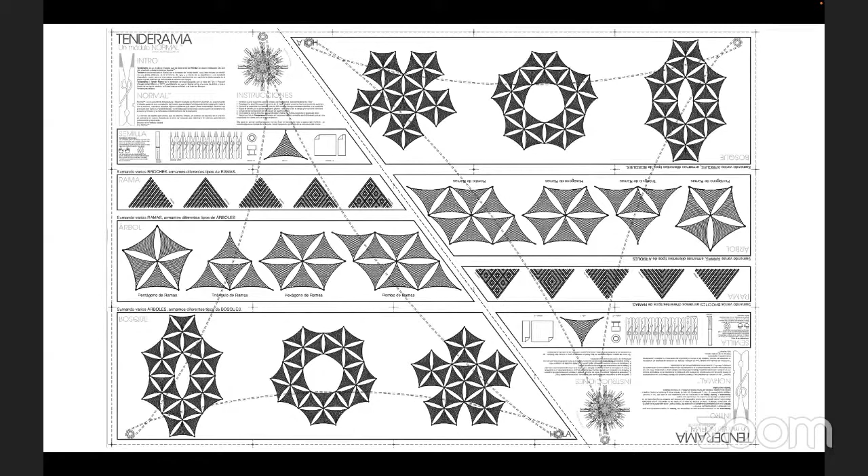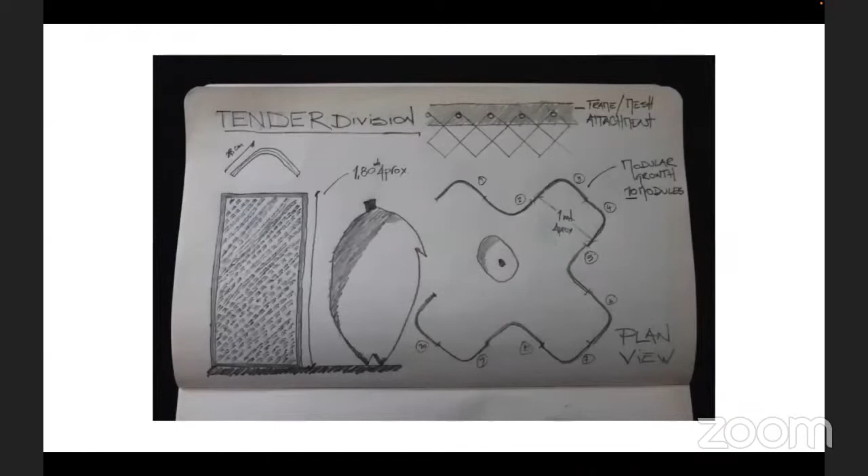So, Zoom, share screen, and I have to share. It's not Keynote, desktop, that one. Desktop 2? Desktop 2, yes. Share. And the other thing I have to exit is... I'm trying to get back to here. I don't know where the mouse is. Just try to hit play and see if it'll do it. Yeah, but I don't find the mouse. Oh, I got it. I don't know. Oh shit, wait, so the mouse, there it is. It's coming back. Here, play. Boom, got it. Okay, perfect.

Okay, we're going to get started. First, thanks to everybody for coming, and I'm going to have the really boring part, which is to do the introduction. We were joking outside with Rocky about stories when Martín was here in 2008. Rocky started to tell a story to Mark. Martín was like, wait, I'm going to tell it in the talk. So I'm just going to give a very formal introduction. Probably odd that I'm giving an introduction. Claudio could certainly be the person to give the introduction. Mark, you could do it. But I'm just going to read this and then turn it over to Martín.

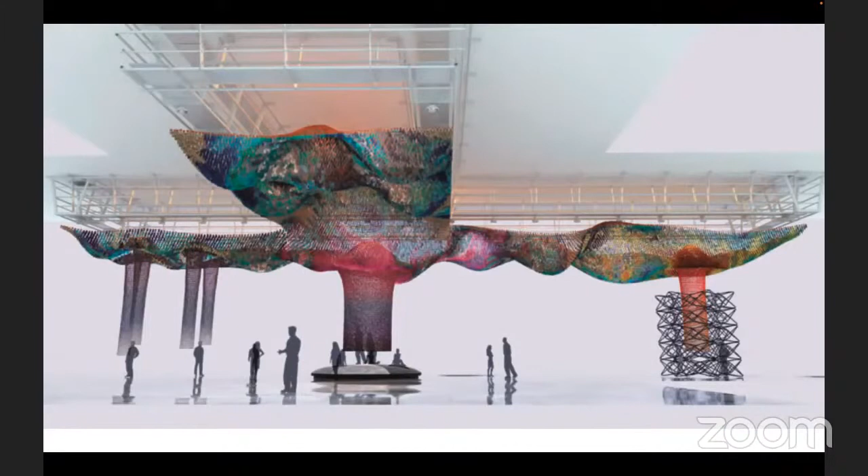So Martín Huberman is an architect and director of Estudio Normal in Buenos Aires, an architecture and research office where he develops experimental and speculative projects on the built environment. His works and projects have been exhibited in different cultural venues around the world. In 2011, he founded Mano Ambiente, the first nonprofit gallery in South America specialized in experimental architecture and design. The gallery has built and installed exhibitions from some of the most renowned offices of Ibero-America, and produced exhibitions with other institutions such as the Storefront for Art and Architecture in New York, Liga, Espacio de Arquitectura in Mexico City, and the Canadian Centre for Architecture. Since 2015, Martín has directed a preservation and development program for the archive of deceased architect Amancio Williams, experimenting with new forms of digitization and dissemination of this culturally important architectural archive. If any of you don't know who Amancio Williams was, you have to take a class with Claudio. Since 2018, Martín has curated exhibitions and research projects for different institutions and museums, such as the Canadian Centre for Architecture, where he is curator of the CCA c/o Buenos Aires program from 2020 through 2023. Here at ASU, Martín will begin to talk about his non-traditional career path, from his professional education to today. And with that, please help me welcome Martín.

Well, thank you all for being here. Should I have to speak to the microphone? Thank you, Phil, for making this happen, and thank you, Rocky, for lunch. I'm going to start by...

showing some of the earlier work that brought me here. This is a studio we were doing in Buenos Aires when Claudio Vekstein brought some ASU students to work in BA, and then afterward some Argentinian students would come to ASU to fulfill the work. I was the only one to come, and the program died after me. So that might be a good thing or a bad thing.

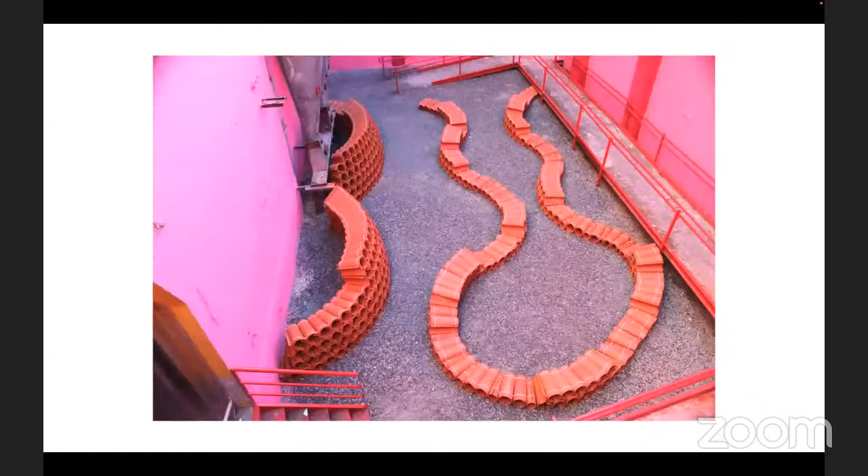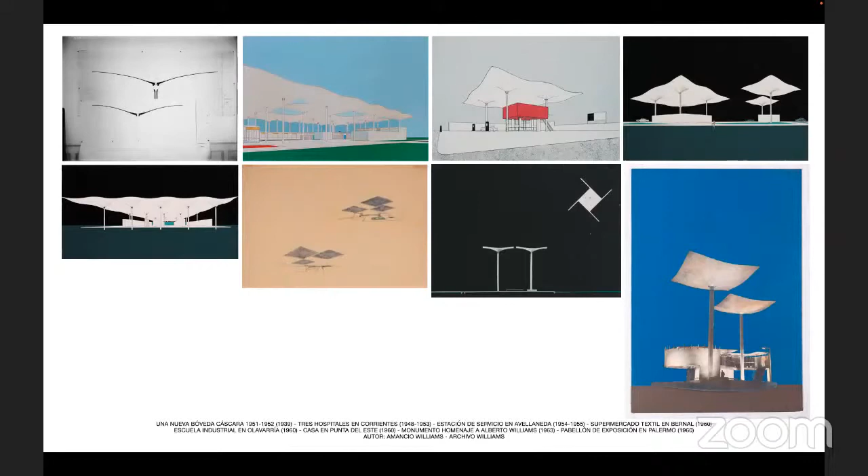The project we researched was the classroom of the future. There was a huge problem of classroom availability in the western US, where population growth of schools was surpassing their ability to build new classrooms, so they ended up adding trailers. We found those trailers were supposed to stay only a summer or a year, but they ended up staying for 15 years. So we developed a project based on research into how to create a classroom that would fit new ways of learning over 15 years.

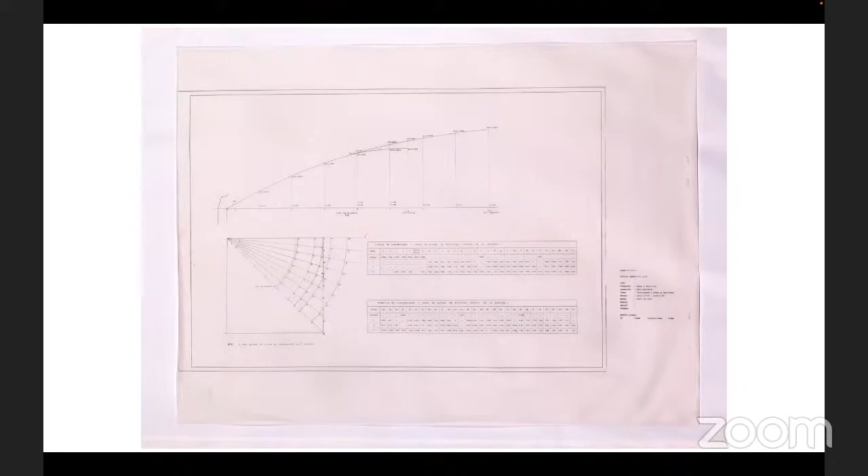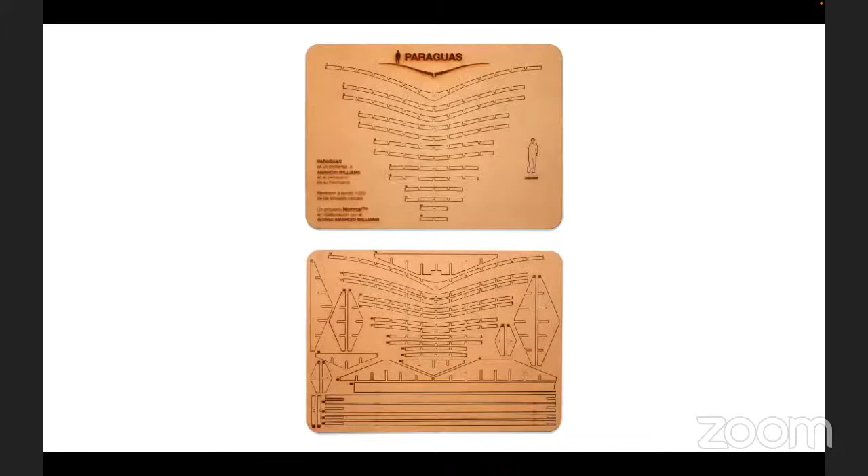We were hired by a London agency to work on large-scale pieces for a store opening in London. So very quickly, this is actually two years after leaving ASU, we were already traveling with our work. That was very, very fun.

Then we started working on new logics for how to create this language and how to take it not just into large-scale installations but smaller ones, allowing people to work their own micro installations. Through that, we made an object requested by a local museum to be sold in their store. For us, it was the entry gate to museums — in Buenos Aires, there are no exhibition spaces for architecture.

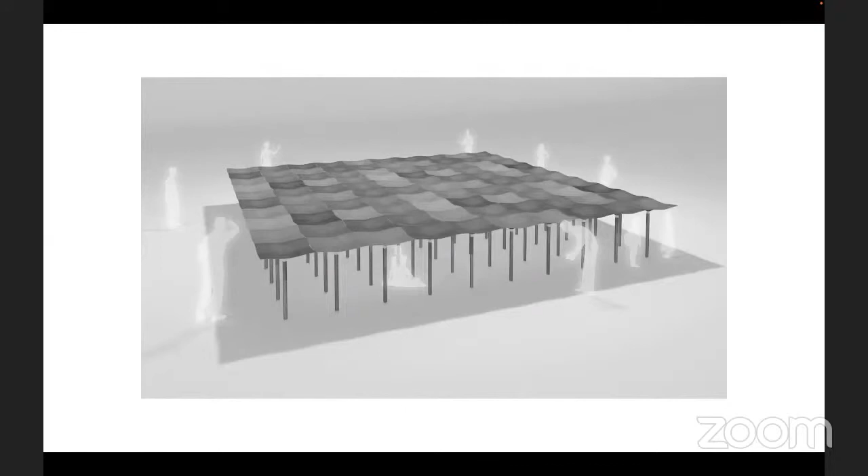This is in Paris, this is Madrid, and this is the office of Juan Herreros, Estudio Herreros, back in the day. We connected because he knew our work and asked if we could do something for his office.

This is when the system that up to that point was only a suspended system became a vertical system, like a wall. It allowed us to discover the possibilities of creating a new wall system or a new division.

We showed that to the gallery in Paris, and they asked us to prepare products for them that were exhibited in Le Grand Magasin de Paris. As we were making products, we realized that through the same logics we could create this vortex. That's what we called the first lamps we made.

Through lamps we decided to go bigger, obviously. A friend of ours had this beautiful house and wanted an installation made by us. So we found this ring in the trash, literally, and we managed to fill it with 5,000 clothespins.

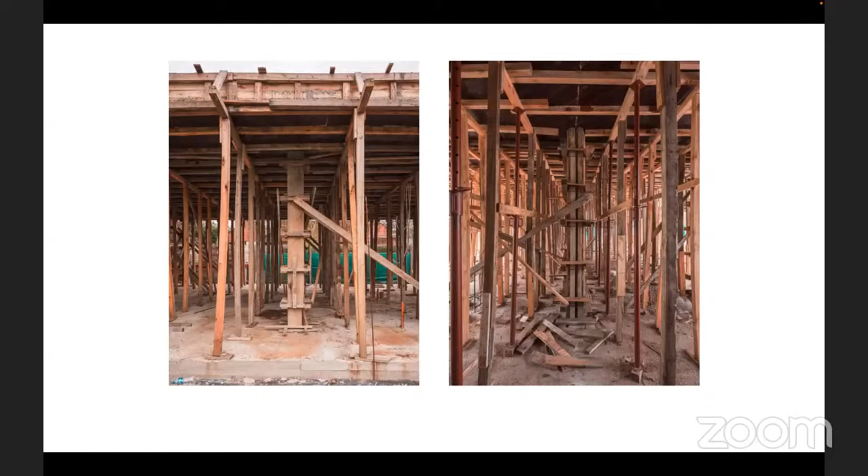This is an idea of scale. That's the moment where we realized we were not building objects anymore, but spaces. So we started to push that agenda forward.

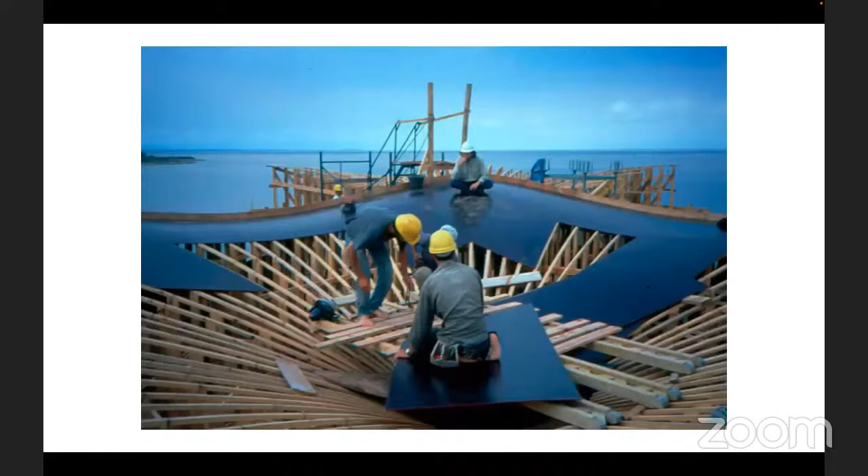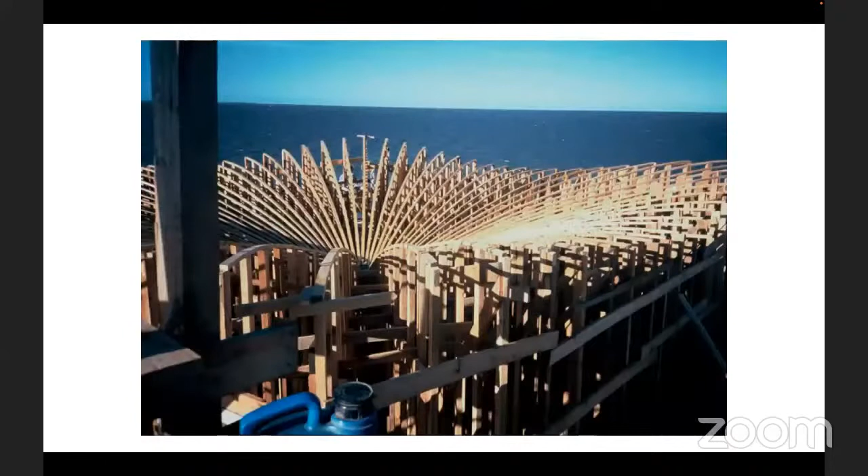It took us a couple of years, but this is our biggest installation so far: 70,000 clothespins at the Museo Mar in Mar del Plata, near Buenos Aires.

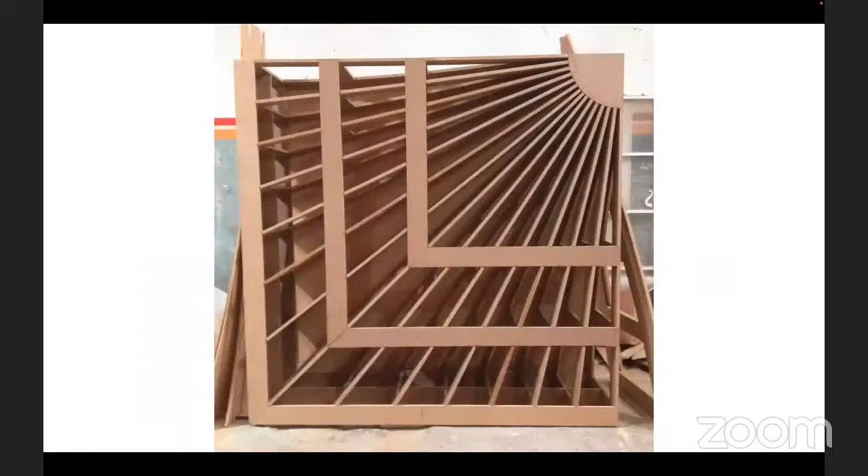This is a 45-foot-tall structure. It had a mirror on the top of it, so it broke the space, the void of the museum, and we laid down a small structure below, a small mattress, a small bed for people to lay down and reflect themselves into space.

We are still trying to get the full storm, not just the vortex, but we are trying to get these strategies. From that moment on, we understood that there was something in materials, like a secret hidden within itself.

This is what in the studio we call industrial archaeology. We look for materials that already have something within. So this is Rocky and Vernon, a former ASU student, also going through the hardware store, looking for things that we could use to create strategies.

These are laundry baskets that we took off the streets. We wanted to create a structure that allowed us to fight against cars in the street.

Then we took it to a big hill that crowns part of the city of Buenos Aires, and I tried to use it as a medium of transport, which obviously didn't work.

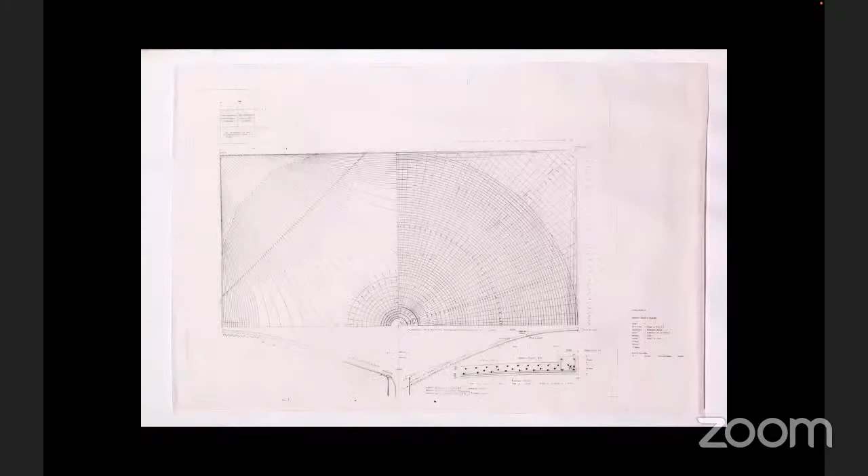These are plastic hexagonal benches that ended up turning into a concert scenario for one of the Buenos Aires electronic music bands.

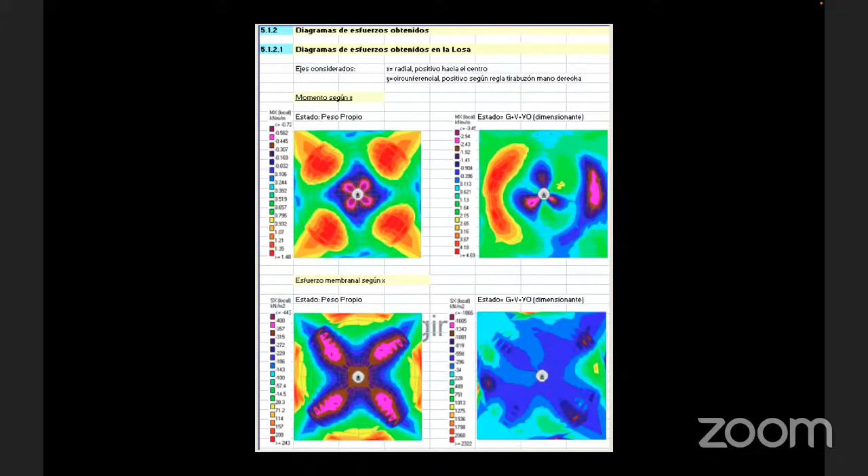And then we continued going into industries, knocking on industries' doors, convincing them to let us in, trying to get them into new projects, which we couldn't, but we ended up having a lot of good results by just taking things that they already have.

This is styrofoam, this is how styrofoam is made. The styrofoams are inside the wood—how do you call these walls? Composite walls? Yeah, those composite walls.

Well, these are like 5 meter bricks, each one weighing 70 kilos, which I think is something like 150 pounds. This was a structure all made by hand by us. It was a VIP area for a major art show in Buenos Aires.

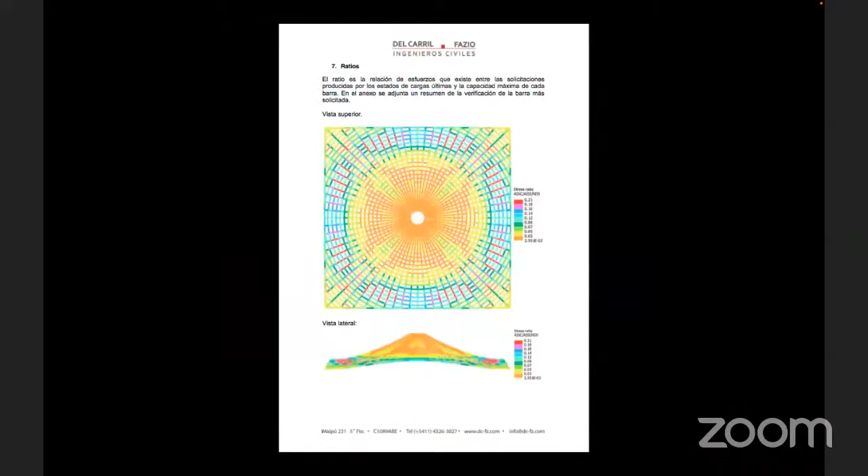But the problem up to here was that none of these objects had a story within it. We gave them new narratives, but they didn't come with a narrative up until the moment that we got to the colonial tile.

The colonial tile—this was a piece we did for the 200-year revolution, the bicentennial of the Revolution of May, which is the moment Argentina left the Spanish crown and became a republic on its own. The thing is that after 200 years we are still using an object that refers to the colony. So that object had a story on itself.

By representing the object through a formal revolution, we were speaking about the history, about the material, at the same time that we created the mythology of being on a roof, sitting on a warm roof in the summer. So we started creating spaces for venues, for musical venues and stuff.

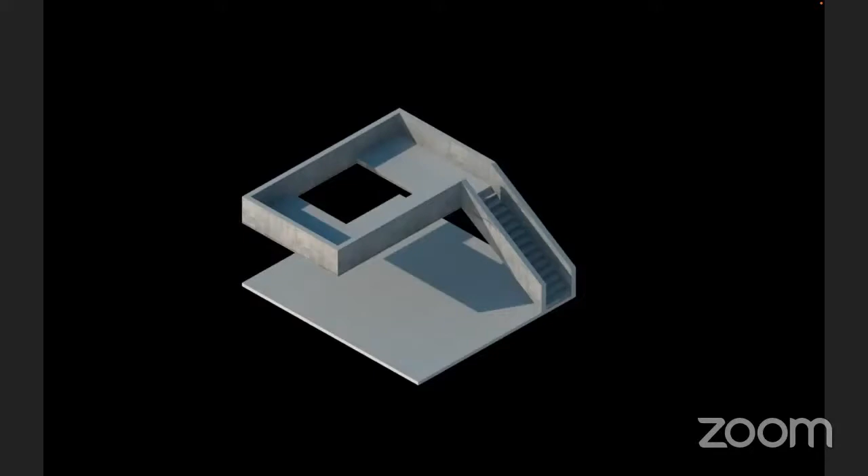But that's where we realized that we wanted to work with historical research. We wanted to go beyond the material itself and start going deeper into the books. That's where I kind of copied Claudio Vekstein's love for this iconic Argentinian architect called Amancio Williams.

I was very fond of this project called Una bóveda cáscara, it's also una paraboloide hiperbólico, a project that Amancio Williams worked on for 15 years until it was finally completed. During those 15 years, he depicted his idea from a street level perspective, trying to put this typology into houses, supermarkets, industry, pavilions, memorial pavilions.

But the only picture he takes when he finally builds it is on top of it, discovering that maybe the top part of the paraguas, as it's popularly known, was maybe even better than the lower part. So with that stupid hypothesis, I started working on research on how to rebuild that project.

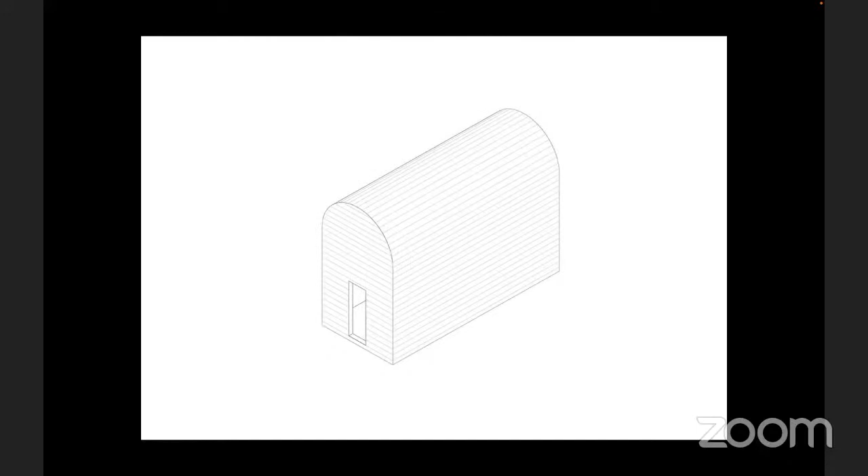The first thing we did was—since I do not want to work with historical archives because it gives me a lot of anxiety to be so close to history and to maybe spill something out of a blueprint—we asked if we could digitize all the blueprints of the Paraguas project, of the Bóvedas Cáscara.

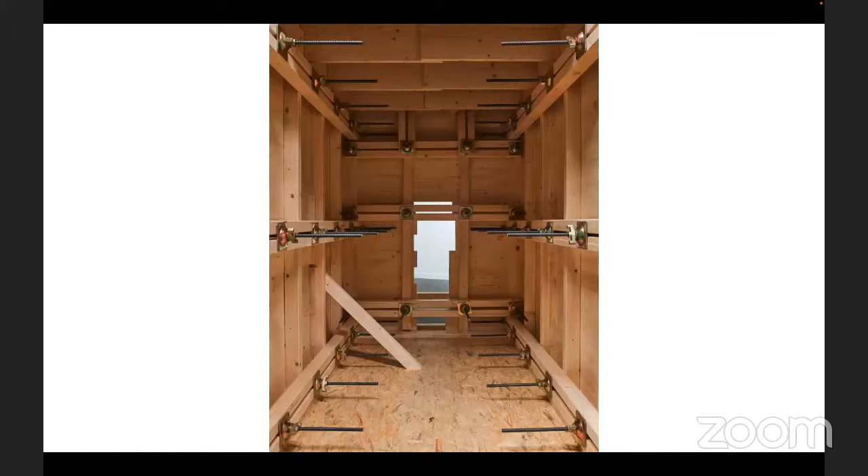So we started a collaboration with the Archivo Williams, an archive held by the sons of Amancio Williams. He had nine sons and daughters, and they all were after it. It allowed us to understand better the structures and the ways of Amancio's thinking.

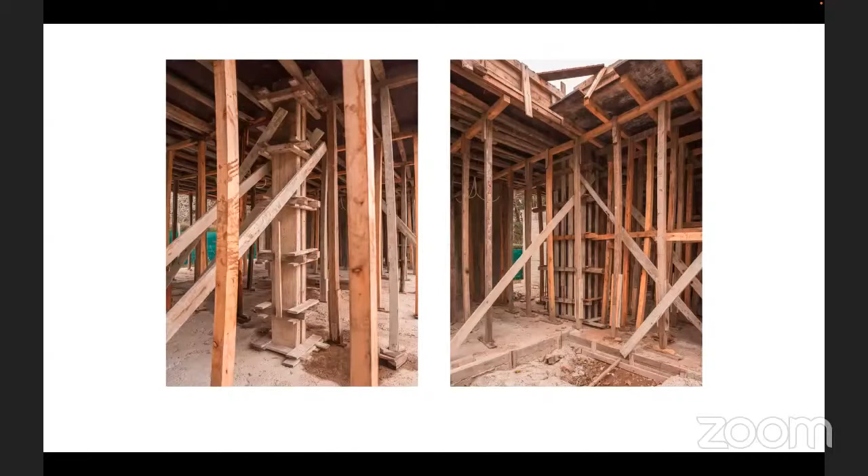For example, he ended up building a monolithic structure, but when you see the original blueprints, you see that he was thinking of a duolithic structure—the paraguas as a piece on itself, and then the column that goes all the way down as another piece.

We also discovered the genius behind the structure. The surface is very complex, yet it's only designed from nine curves. By designing nine curves, he managed to create a very complex surface. He also tried to do it in bricks, in metal, and other strategies. That's what we discovered by digging.

But what we were most interested in is that before he managed to build the big one, he did a small one to corroborate some of his ideas. So we went after that.

Obviously, doing a small concrete structure like that was an expensive job. And back in the day, nobody cared about Amancio Williams, and even less would they care about an Amancio Williams research-based project. So we ended up creating a strategy.

We decided to narrate our process through reconstruction. So we built a small object for people to be able to give to their friends or architect friends and tell the story about the studio that wants to rebuild some of the Amancio Williams structures.

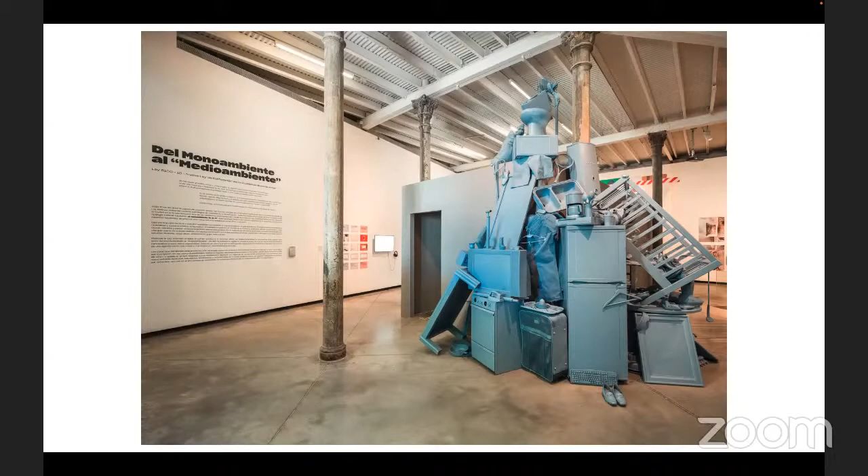In the museum, at this point, we were sharing space with Amancio Williams himself, who was depicted in the boards in the back.

That led us to a complete design strategy, not just for museums, but for clients themselves. We had this idea: why don't we design a concrete structure that is never going to be built, but trick the formwork woodmaker into thinking that it will. So it's like cutting the process in between.

We call this project the ghost limb, because concrete has this language of the formwork on itself. Every time you see concrete, out of the blue, you see traces of the handcraft of it, that it's lost in space.

That office didn't end up being built, but we used that project to pitch an idea for a Swiss museum that was asking us to work on the studiolo, one of the most ancient typologies in architecture, the Cabinet de Curiosites or Il Grotto, secluded spaces where notaries or rich people used to get secluded with all their most darkest wishes and collections. This is like what in America would be called a man cave. Back in the day in Florence, this was what a man cave used to look like.

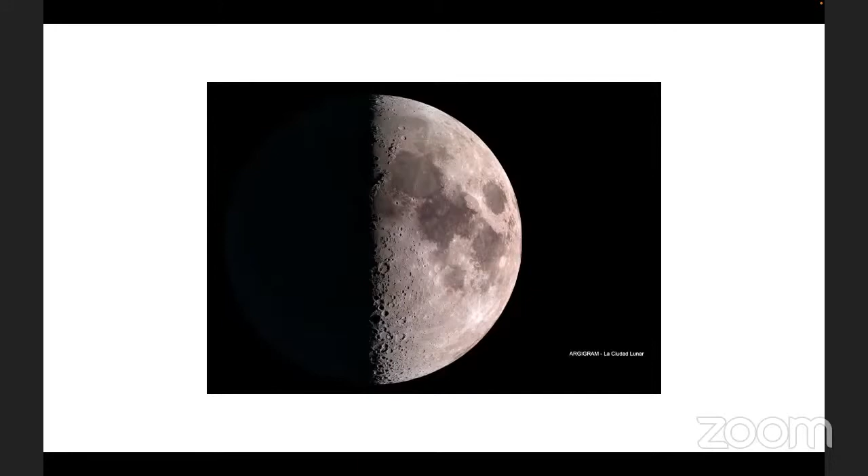So I decided to open a small shop called Monoambiente, which is the single livable unit, the smallest livable single unit available in the market. It's the same unit sold commercially that has been part of the real estate bubble in Buenos Aires. It's the same size as the traditional livable structure available in villas, in slums.

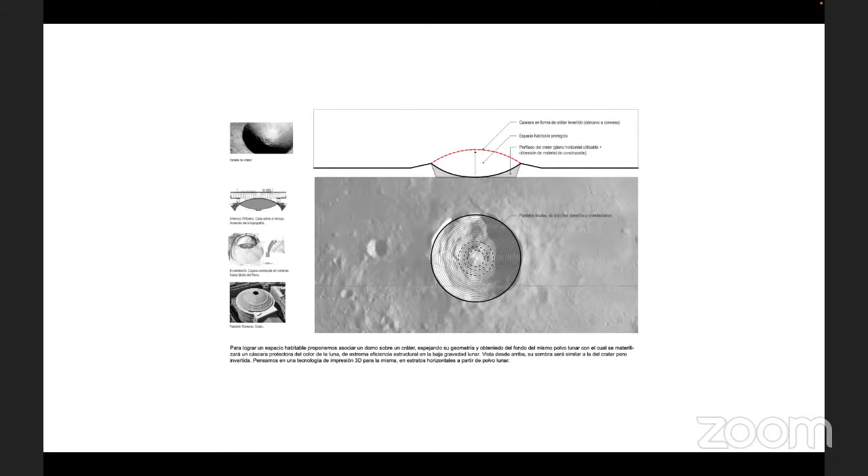The only thing is, commercial real estate sells it for one family, and in villas it might even hold up to three families. So we figured out that through experimental invitations to different offices, we would be able to make the cake grow. And as we already had a piece of that cake, our piece would grow. But at the same time, a community was being formed.

We thought the difficult part would be to create a market for the gallery. We found out very quickly that there was no market, and that we had to go non-profit. We also understood that there was no culture within design offices to perform these kinds of work, so everybody invited thought we were an art gallery and wanted to represent their art. Up until Monoambiente, the way to represent architecture was always through representations of architecture, such as models, plans, pictures, but never the architecture itself.

So what we focused on was that every project had to be site-specific for the gallery, and would have to be represented on itself. It's not a representation of something that is not there. It's what's in there that is interesting.

We ended up collaborating with some of the most interesting galleries around the continent. Maybe one of the most interesting exhibitions we did was along with the Canadian Centre for Architecture, depicting a show called The Other Architect, about creating a collection of offices that do not work strictly as projective offices, but more as research-based offices. We invited fashion designers, industrial designers, architects that became cooks, architects that became artists. And one day we decided to close, because we were repeating ourselves after 20 exhibitions.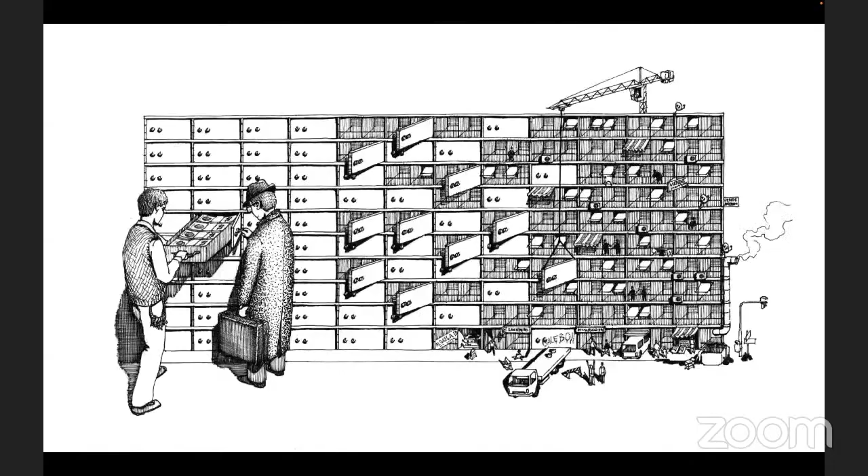A myriad of projects. We worked on this for 5 years, up until the moment the family decided to donate the archive. So our last curatorial piece on the Archivo Amancio Williams was a goodbye event where everyone who worked with him, or worked with the archive, or knew it, wrote a letter to Amancio himself. One of the most iconic moments for me was listening to a Kenneth Frampton letter where he was asking forgiveness from Amancio Williams for not including him in his famous book about contemporary architecture of the 20th century.

Once that happened, I started working for larger institutions, creating exhibitions, and again trying to depict new ways of looking at architecture and design.

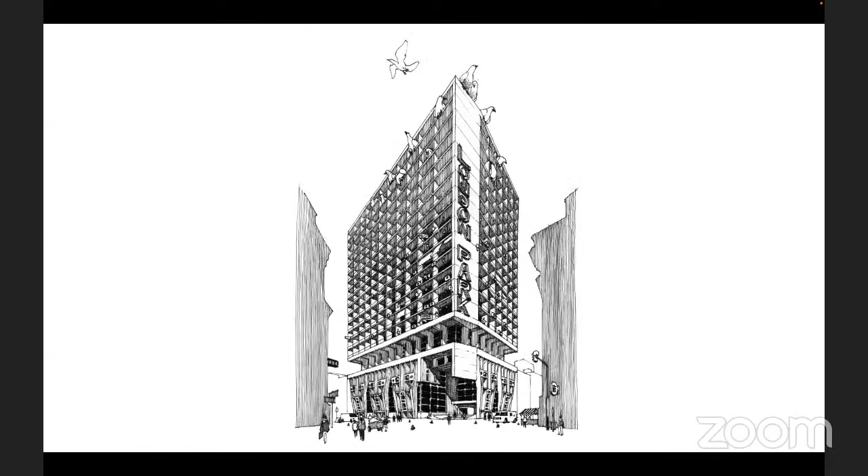This was called Towards an Agenda, rephrasing Le Corbusier's famous book Towards an Architecture. What we were trying to do is understand the disciplines of architecture and design not just as object-producing disciplines, but as research-based or thoughtful strategies. As professionals, we have the amazing possibility to foresee something that's not there yet. We can project upon it, we can design upon it, but most of all we can show it, exhibit it, communicate it through renderings, drawings, photographs.

So we started working on laws. We worked on 3 different laws that were happening in Buenos Aires at that time. One new law changed the monoambiente, the single studio, from a large structure to a very minimal structure, which is depicted in this picture. By creating this small space, all of these objects will have to go.

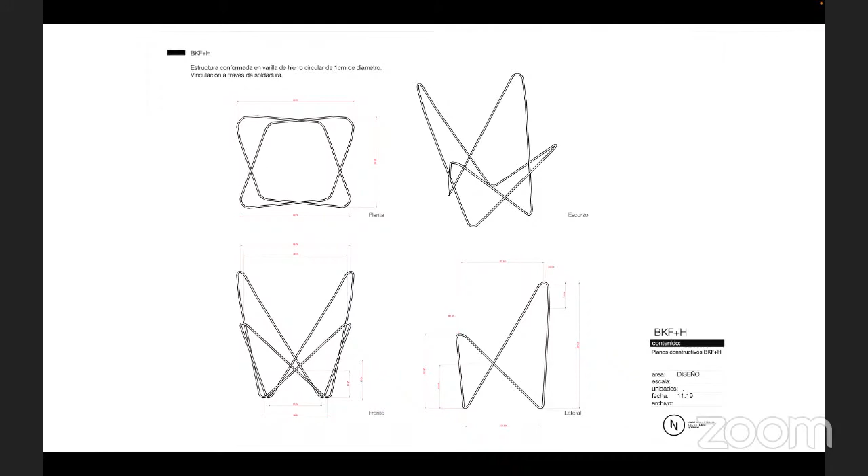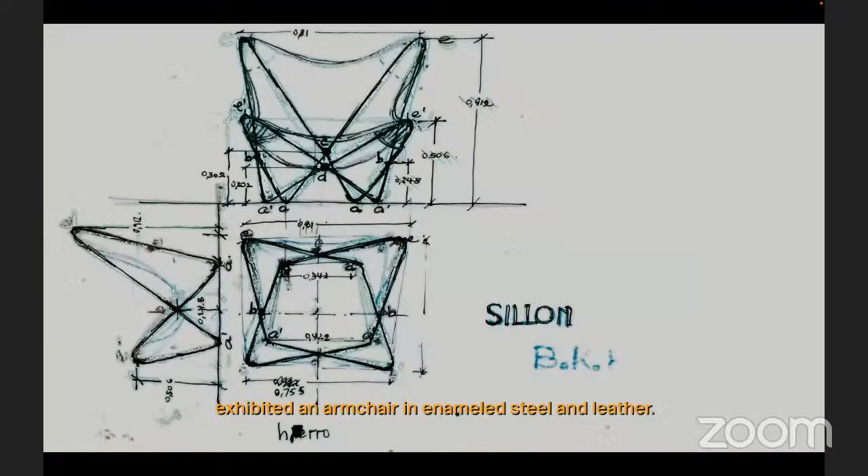Another piece by Fernando Schapochnik represents architecture's byproduct. These are containers typically used in architecture to throw demolition pieces or everything produced by a construction site. When one of these appears on your block, all the neighbors start throwing their trash into it. It's like an amazing void that nobody takes care of, so they throw everything in. Fernando's series of pictures is very representative of that.

At this moment we started to think that architecture, beyond itself, actually creates a second architecture that we are not in control of.

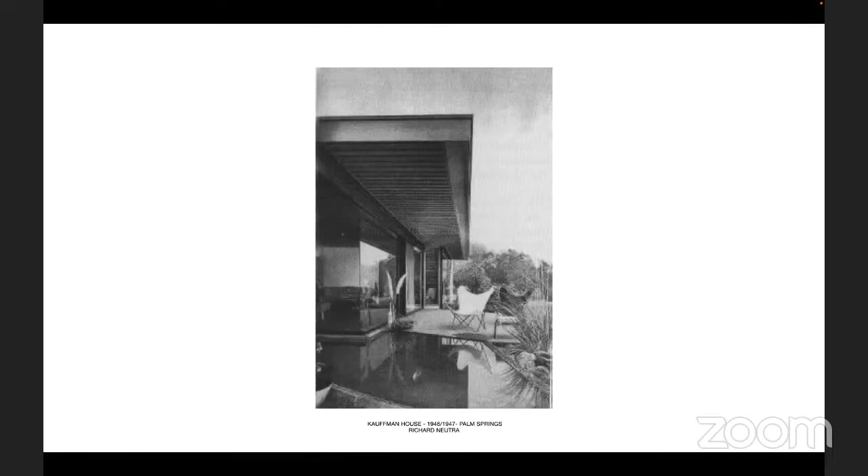The second large-scale exhibition was based on the idea of regaining the narrative of the future. I took the logics of Archigram, who when they started were in school, a bunch of crazy guys who managed, through a fanzine, to perform an idea of a future that's still important today. We are still revisiting Archigram, and it's like you guys starting a project here at ASU that ends up being part of a major cultural event in the history of modern architecture.

So we understood that the city was maybe the best strategy to plan some of these ideas of the future.

So I selected 10 offices, and I gave each office one particular scenario or urban scenario to work on. My most beloved one was the lunar one, the moon, the city of the moon.

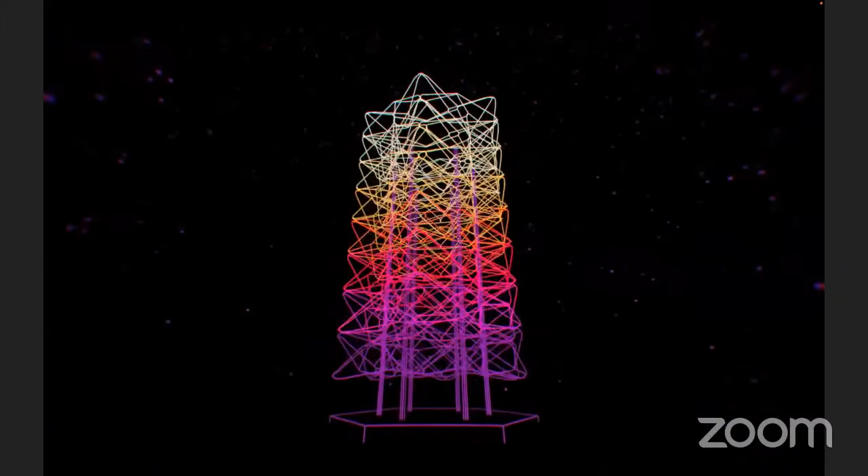Part of the idea of this project was to regain the narrative of our own future. As a third world country, we usually end up acquiring futures that are designed elsewhere. We use phones designed in California. We end up following the steps of astronauts that arrived to the moon, or even look at the moon in a very technocratic way. So I was wondering what would happen if we started to think ourselves about these same logics.

This is where I received this beautiful presentation by Diego Arraigada, who I think is the best Argentinian architect of the present. He was working on La Ciudad Lunar, the moon city. What Diego said is that the moon is mostly a landscape, and most of it would remain a landscape for the 99.99999% of the population that is still going to see the moon as a landscape.

So his idea for the city was, in one part, a sustainable idea on how to create space using craters as already existing spaces, and how to cover the space of the crater through una cúpula.

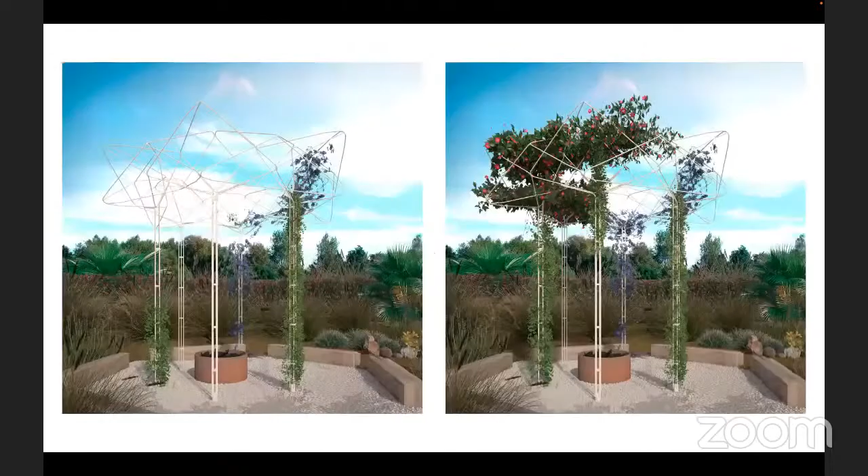The last curatorial piece I'm going to show is the last installment we did for the Canadian Center for Architecture, for the Buenos Aires program. It's called You Met Me at a Very Strange Time in My Life, inspired by this moment from Fight Club, when Tyler Durden achieves his goal of demolishing all the credit banks. All the banks collapse, creating this idea of a ground zero for financial debt and a kind of revolution of freedom from debt.

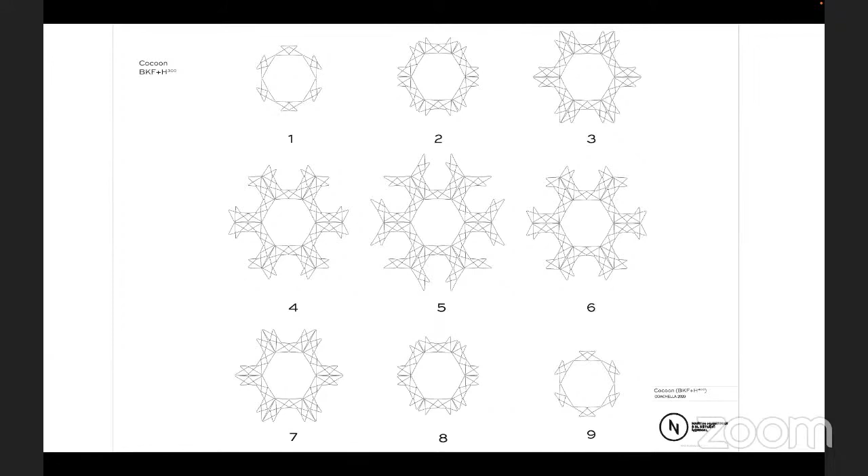In Buenos Aires, something like that happened 20 years ago. In 2001, there was one of the biggest crises, as big for us as 2008 was for you, maybe even worse. All the banks shut the possibility for people to get their savings out. All trust in banks collapsed, so people with money didn't want to put it in the bank anymore. Architecture appeared as the perfect scenario to invest, to put your money into bricks, the safest scenario.

This is real, I did it. On a backpack, fearing you'd be robbed of all your savings, you put it on a table, spend three hours counting it, and then buy a house.

So when that happened, architecture had been building an aesthetic of trust. Architecture built all the banks; all the central area of Buenos Aires is filled with banks. All the major stations, all the major banks have their headquarters there, built over 70 years. They did all the traditional things, bringing marble from Italy and the best architects from around the world, to create this idea that banks are a formal institution—up until 2001, when they stopped letting people in.